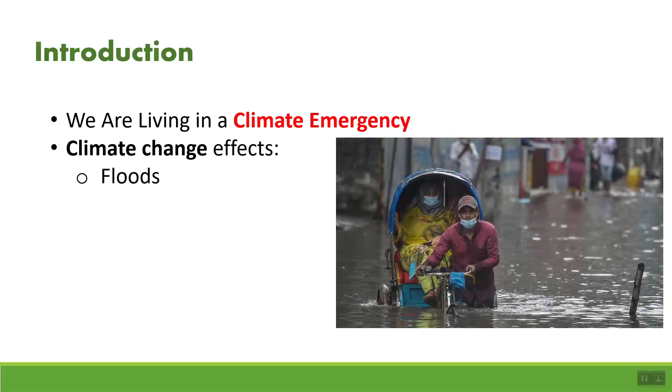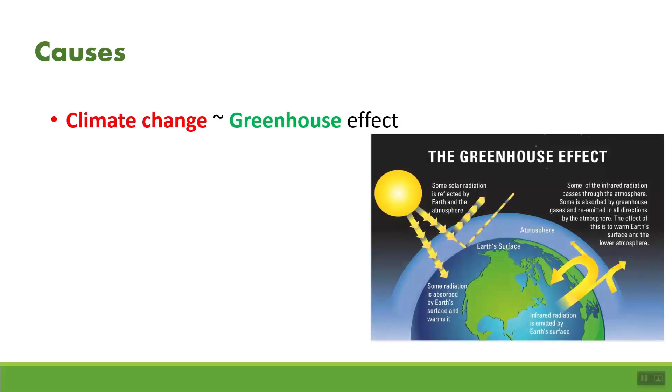As an introduction, at the present moment, we are living in a climate emergency, as is very visible to every person in this world, and every person is affected by this issue. Climate change causes a lot of problems such as floods, wildfires, droughts, and other environmental impacts. The main cause of climate change is the greenhouse effect, which is caused mainly by greenhouse gases including CO2, CH4, and N2O. But mainly, CO2 is the most responsible greenhouse gas, as it is the most common one.

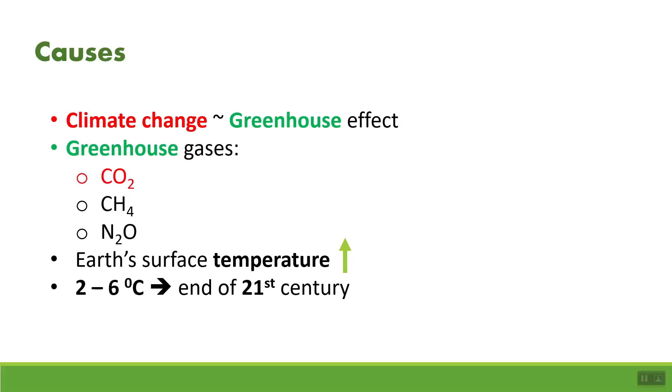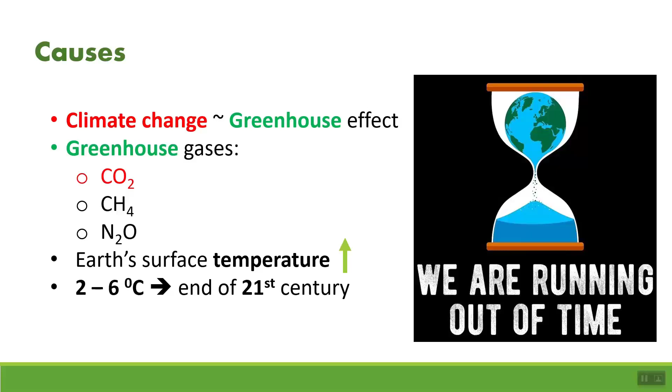The greenhouse effect causes the surface temperature of the Earth to rise with time. Scientists predict that at the end of the 21st century, if we do not make some serious changes about our environmental behavior, we will reach a rise in the average temperature of the Earth's surface by about 2 to 6 degrees Celsius. So we are running out of time. There is no time left to make an environmental action to reverse this serious problem.

Some solutions: the United Nations in 2015 introduced some of the most important and pivotal actions to reverse climate change. They agreed that by 2030 we will achieve about 45% CO2 reduction, and by 2050 we will reach net zero carbon, such that the amount of carbon dioxide we emit, we will reduce its impact by using renewable energy and other strategies, so that we will reach net zero carbon.

This is a common responsibility between all fields and all specialties. In civil engineering, we can benefit this strategy by using sustainable structural design.

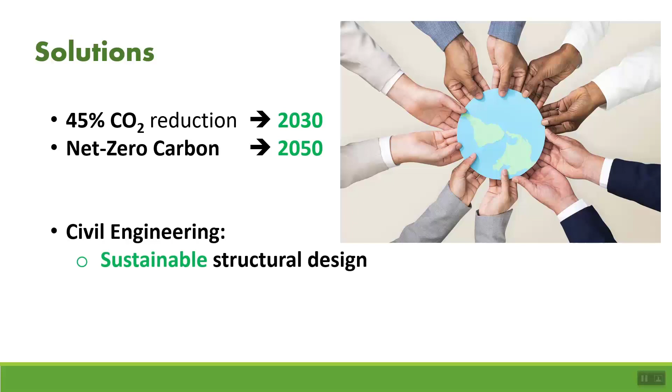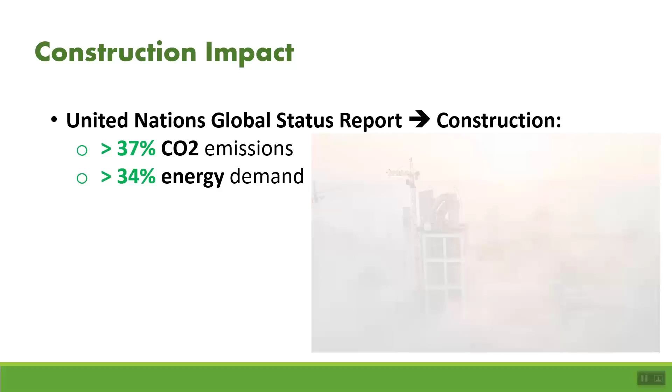To understand the importance of sustainable structural design, we need to see first the construction impact on the environment. According to the United Nations Global Status Report, construction contributes more than 37% of the carbon dioxide emissions worldwide, and more than 34% of energy demand worldwide. Especially the steel industry: the steel industry alone contributes more than 2.5 trillion kilograms of carbon dioxide per year, which represents about 25% of the total CO2 emission worldwide.

The question is, can we minimize this figure? Can we reduce the carbon dioxide emissions worldwide?

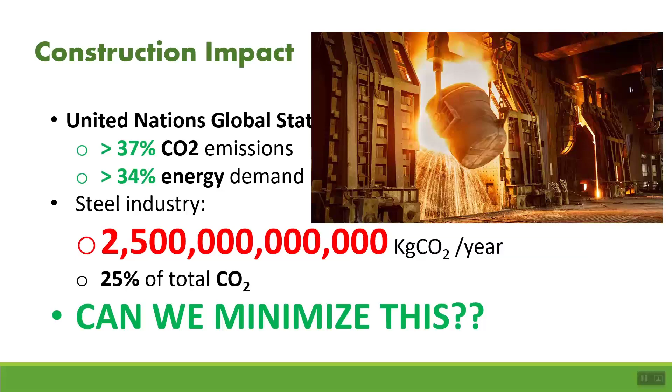The global objectives that the United Nations have put, and Egypt had adopted these goals in its vision for 2030. The United Nations specified 17 goals, which are called the Sustainable Development Goals. These goals aim to achieve sustainable development in all fields, such that by 2050 we will reverse the climate action effect and reach net zero carbon.

From these 17 goals, the main goals that structural engineering can contribute to include decent work and economic growth, industrial innovation and infrastructure, as well as sustainable cities and communities. Finally, responsible consumption and production: we have a limited amount of resources in this world, so we have to be responsible in its consumption and production.

But how? How to achieve these goals? One of the possible solutions is the use of green building materials. Green building materials are those materials that are eco-friendly, that are less harmful to the environment.

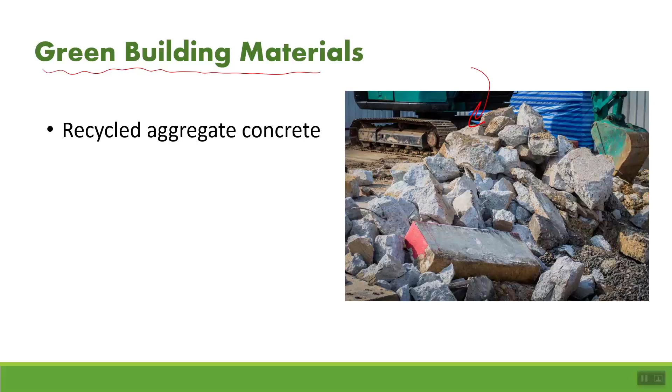These include recycled aggregate concrete. Recycled aggregate concrete is made by demolishing old structures, old reinforced concrete structures, and using the waste materials by crushing it and making it into aggregate for new concretes.

Fly ash concrete: fly ash is a byproduct of the combustion process of coal, which is used to produce electricity in power plants. So this fly ash can be used as a cement replacement in concrete, as we will discuss in this session.

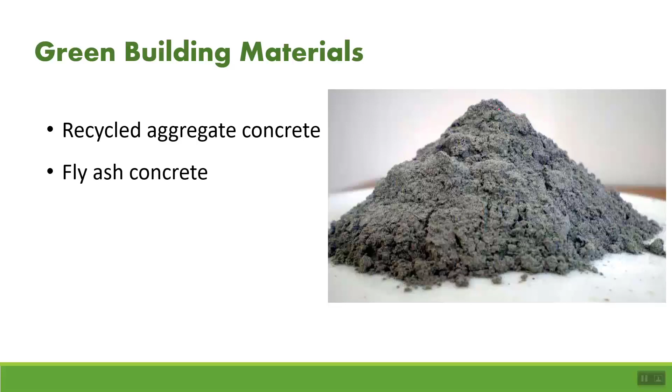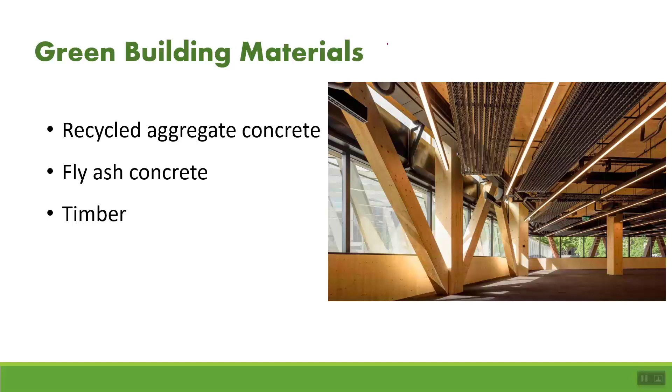Timber is used as a sustainable construction material, especially in the US and Canada, as the amount of trees there is large and can be used as a building construction material. But as it's well known in Egypt, trees are not so commonly available, so it may not be a sustainable material for construction in Egypt. Ultra high performance concrete is a novel material being used in the structural engineering field, which requires a lesser weight of concrete.

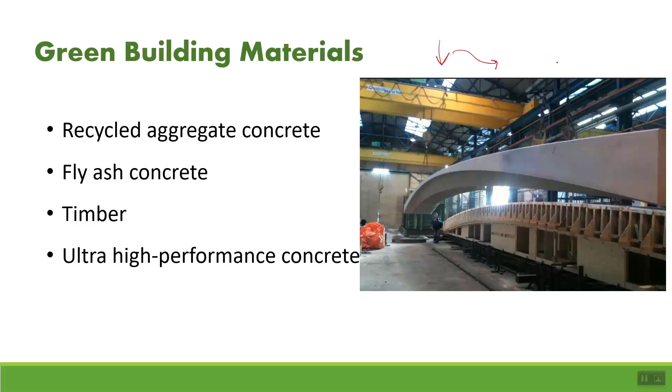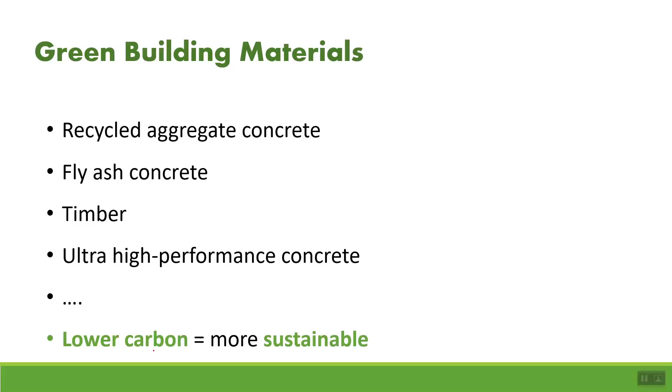So we will use less cement, which will help the environment and reduce environmental impacts. Other sustainable materials are continuously developing and can be used in the future, and we will discuss more materials in future sessions. All these materials have lower carbon emissions, which means they are more sustainable.

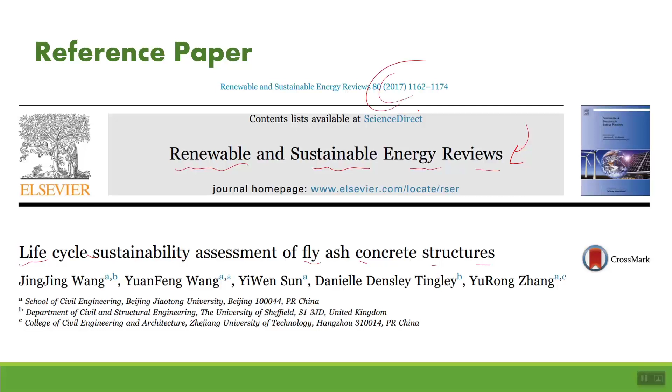Fly ash concrete is the main subject of this session. In this session, we depend mainly on a paper published in Renewable and Sustainable Energy Reviews journal, which is a prestigious journal in the field of environmental engineering. It's called Life Cycle Sustainability Assessment of Fly Ash Concrete Structures, and it was published in 2017.

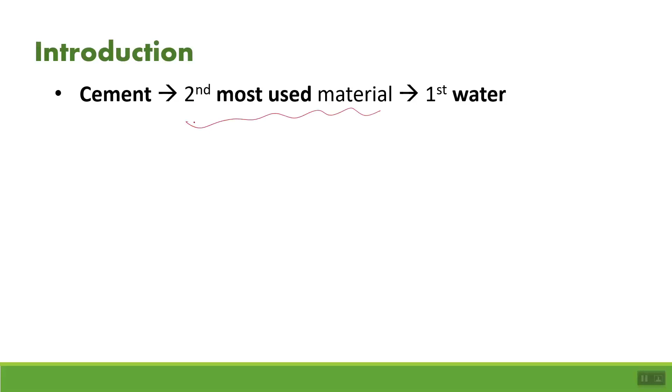As an introduction, cement is considered the second most used material worldwide. The first most used material is water. For each ton of cement produced, we need about 3.1 up to 5 gigajoules of energy to produce 1 ton of cement. For each 1 ton of cement, about 0.73 up to 0.99 tons of carbon dioxide are emitted.

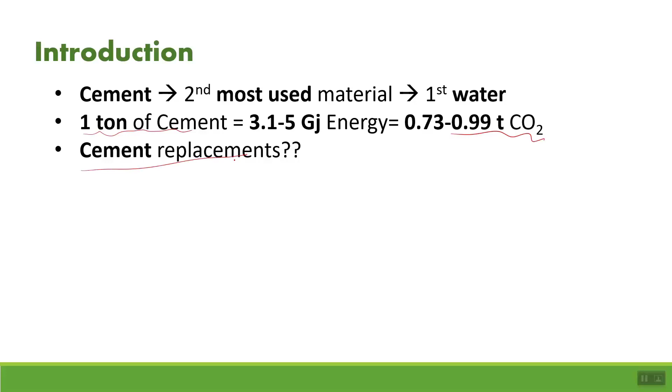So as you can see, cement has a very high impact on the environment. So we need cement replacement. One of the most commonly known cement replacements is fly ash.

Fly ash is a byproduct of coal-fired power plants and is considered the world's 5th largest material resource. This is mainly because of China, which uses coal to power its power plants, so the amount of fly ash produced there is very large, about 700 million tons per year.

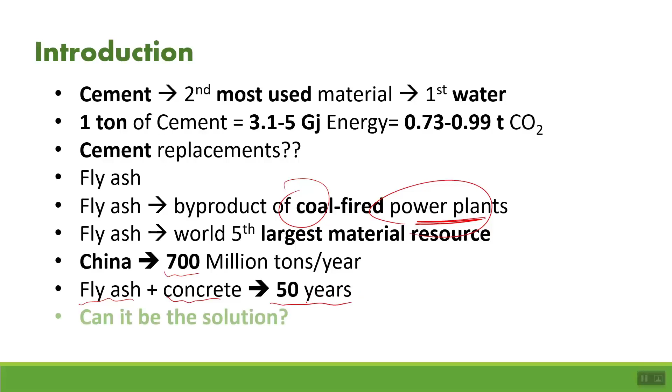The scientific research in using fly ash as a cement replacement in concrete is not recent; it's not a modern idea. It's lasted for more than 50 years. But can fly ash be the solution for this environmental problem and climate change?

How do we judge the sustainability of a material? To judge the sustainability of a material, we need to consider the triple bottom line. The triple bottom line are 3 main factors that need to be considered when looking at whether a material is sustainable or not. The first bottom line is called the environment.

This covers how much carbon emissions are emitted during the fabrication and transportation of this material. The second is the economy, or how much this material costs. And the final bottom line is called social performance, meaning the impact of this material on people, like labor health.

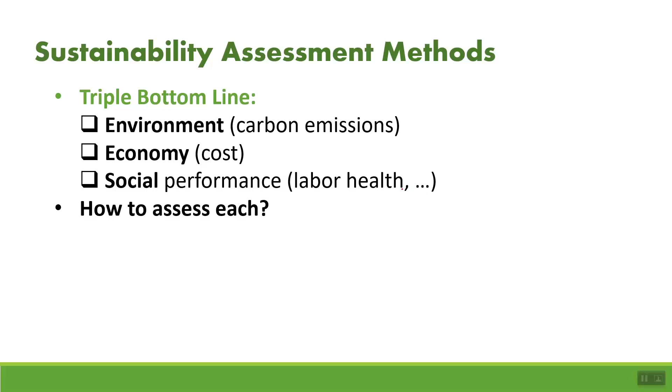How do we assess each of these bottom lines? To assess each bottom line, we need life cycle assessment, LCA, to assess the environmental impact. To assess economy or cost, we need life cycle cost, or LCC. To assess the social performance, we need social life cycle assessment, or SLCA. This way the triple bottom lines can be assessed accurately to determine if this material is sustainable or not.

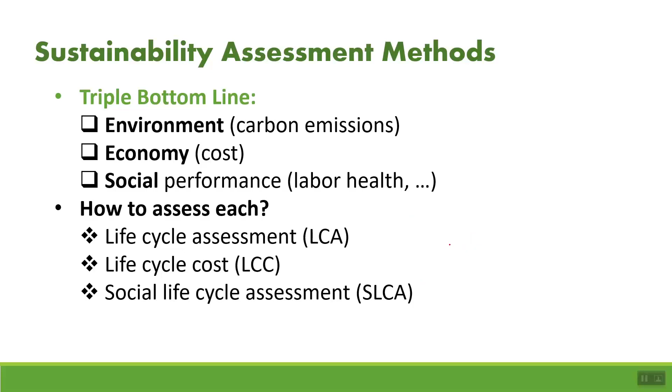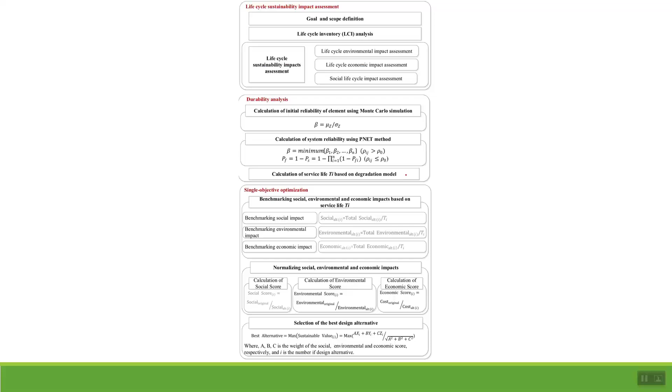The methodology used in this paper—a small notice: this is an engineering paper, so some of the mathematical formulations you do not need to understand, but you need to understand the basic concepts underlying this methodology.

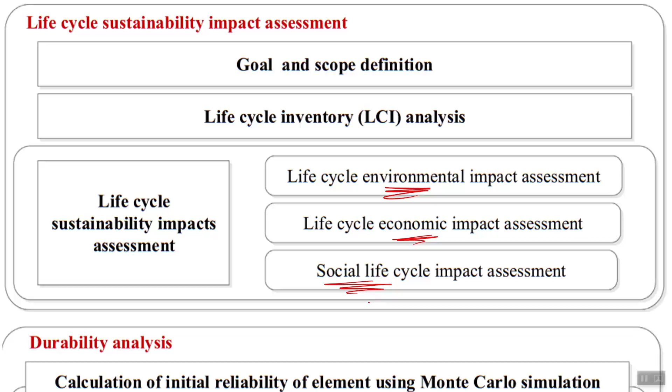First, we need to assess the environmental impact, economic impact, and social life cycle impact of this new sustainable material. Then we need to consider the service life.

You can have an environmentally friendly material such as fly ash, but when using fly ash in concrete, the service life is reduced. So if we use a bridge with reinforced concrete, it may have a service life of about 100 years, but if you use fly ash, it may have a service life of about 25 years. So this is not considered sustainable at all, and using ordinary reinforced concrete may be a better option.

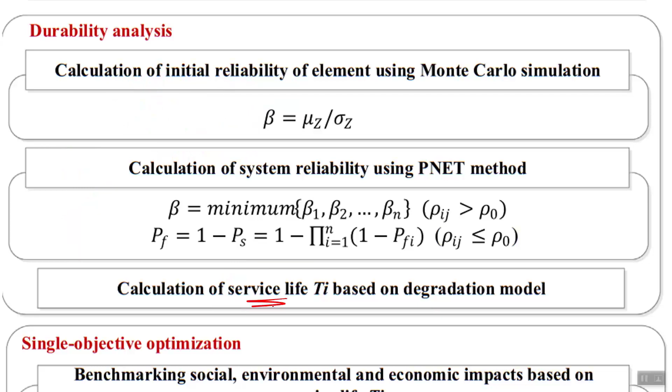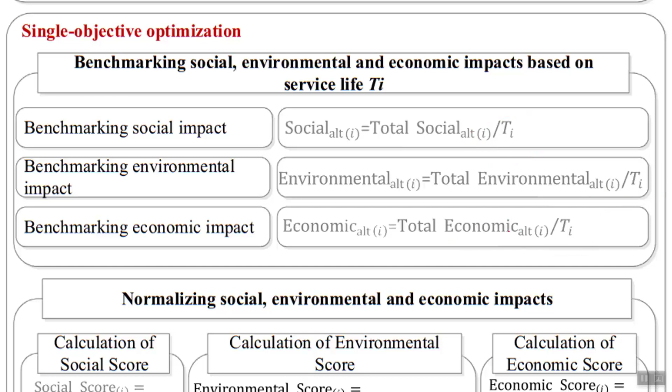So they considered the service life as a factor in determining whether this material is sustainable or not. As you can see, they divided the social impact by the service life, the environmental impact by the service life, and the economic impact by the service life. They determined an environmental score, a social score, and an economic score.

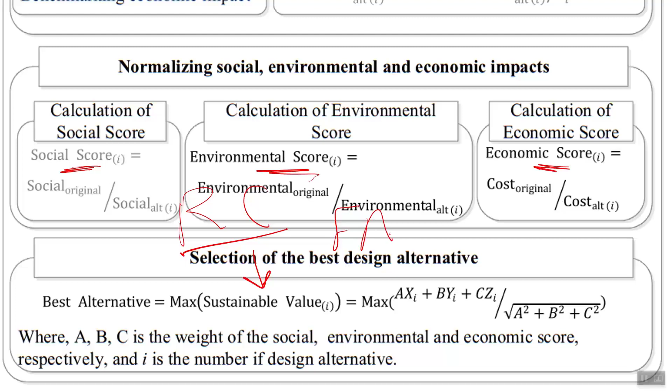Using these three scores, they calculated a sustainable value. This value is used to determine which alternative is more sustainable—reinforced concrete or fly ash concrete. This is the basic methodology used in this research paper.

As a quantitative assessment step, first we need to define the goal and scope. Then we need to determine the life cycle inventory, or LCI. Life cycle inventory is a database of materials that tells us, for example, that 1 ton of cement causes the production of about 1 ton of carbon dioxide. That's what life cycle inventory is all about.

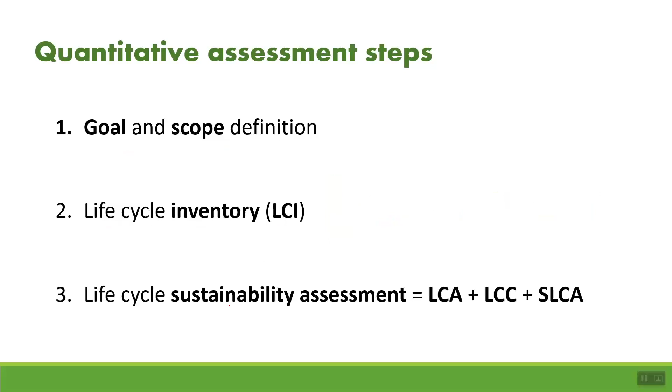Then we need to perform life cycle sustainability assessment. As we mentioned, it's composed of 3 basic steps: life cycle assessment, life cycle cost, and social life cycle impacts.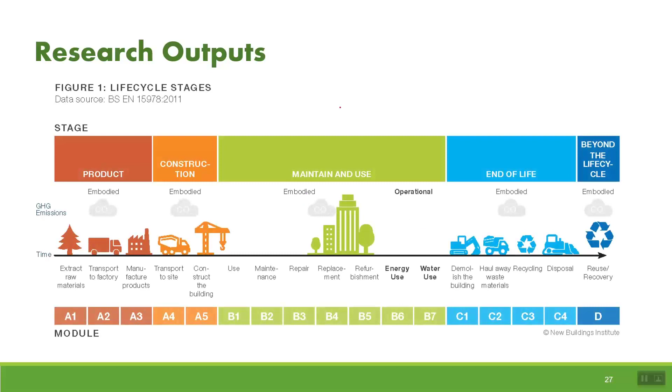According to the British standards EN 15978, which is called Sustainability of Construction Works, the lifetime or the life of a structure can be divided into 5 stages. These 5 stages can be described as follows.

First, the product stage. The product stage consists of 3 main stages: the extraction of raw materials, transportation to the factory, as well as manufacturing the materials.

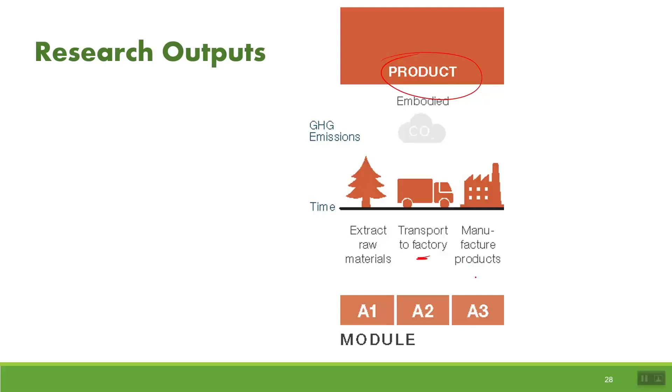Then construction. Construction consists of transportation of the raw material to the site, as well as construction of the building.

The maintenance and use stage. This consists of using the structure, maintenance, repair, replacement, refurbishment, energy use, and water use.

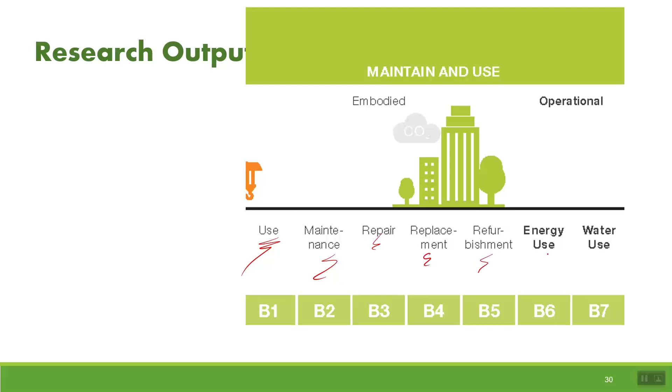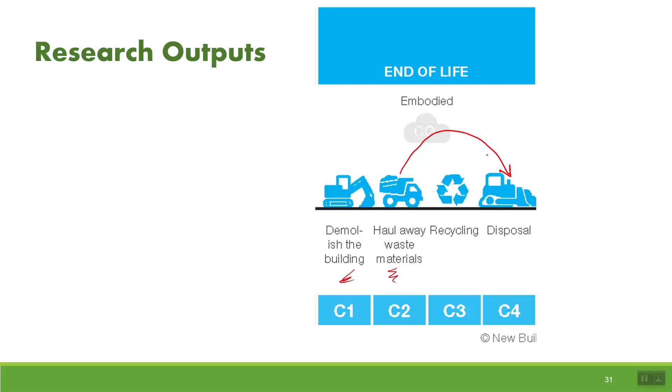End of life stage includes the demolition as well as transportation of waste materials. Transportation of waste materials can be transported for disposal in landfills or on waterways, or can be used for recycling. Then the final stage is beyond the life cycle, or after the building has been demolished.

It can be used for reuse and recovery. These are the main 5 stages for any product or for any structure.

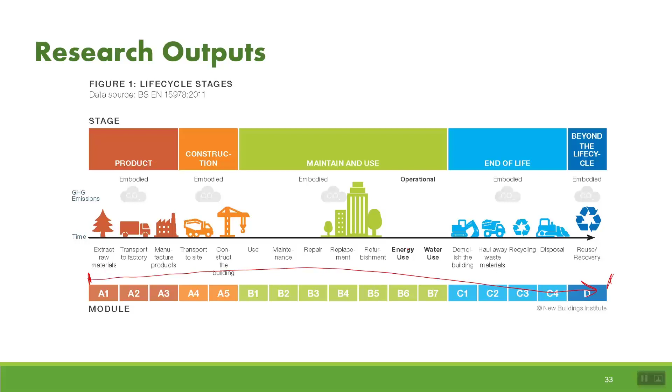If you consider the embodied carbon or carbon emissions from the beginning of the structural life up till the end of the structural life, this is called cradle to cradle. From the moment the raw materials were extracted from the ground up to the point the material were recycled and inputted as a raw material again in a new structure.

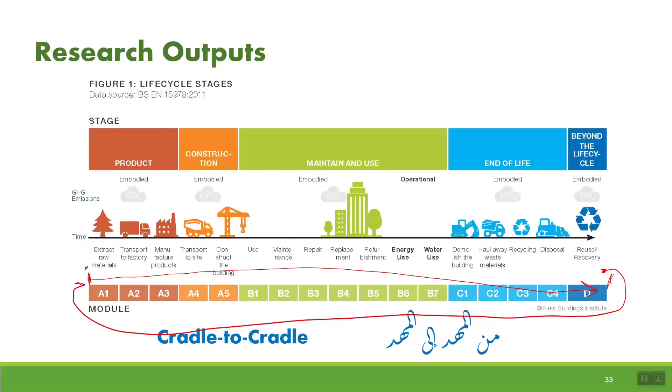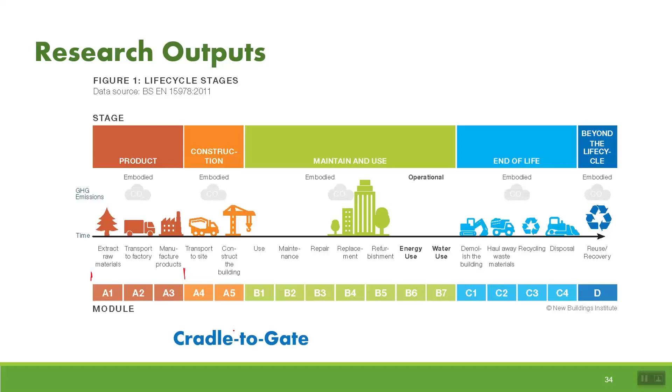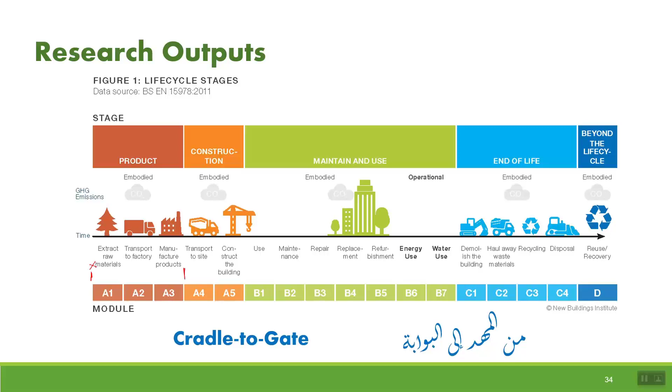But if we considered only the region between the extraction of the material up to the manufacturing of the products, this is called cradle to gate. What we intend from this cradle to gate is the moment from the extraction of the raw materials up to the gate of the manufacturing plant.

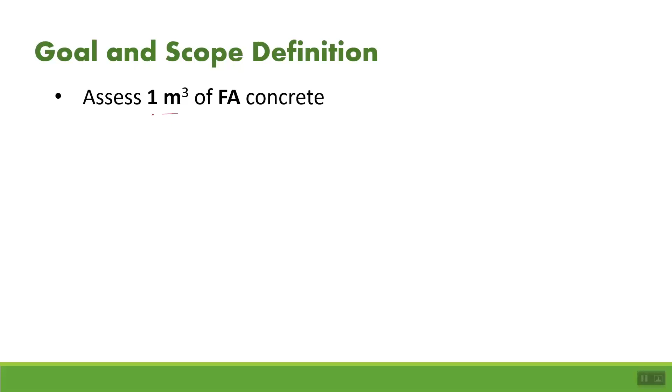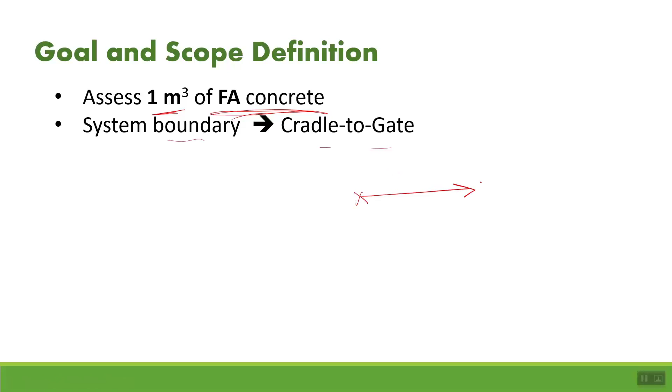First, we define the goal and scope of 1 cubic meter of fly ash concrete. Then we define the system boundary as cradle to gate, meaning from the moment of extraction of raw materials up to the point of manufacturing and exiting the manufacturing plant.

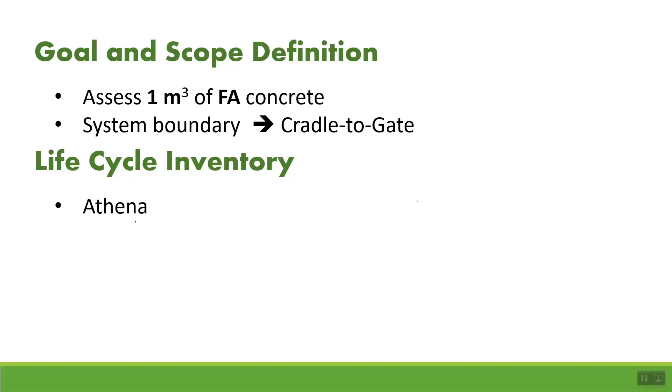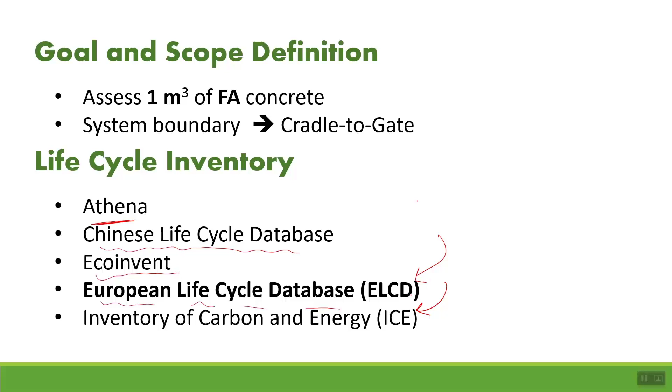For the life cycle inventory, there are many options that can be used, including Athena, Chinese Life Cycle Database, Ecoinvent, European Life Cycle Database, or Inventory of Carbon and Energy. These are among the most famous databases used as life cycle inventory, but in this research, the European Life Cycle Database had been selected.

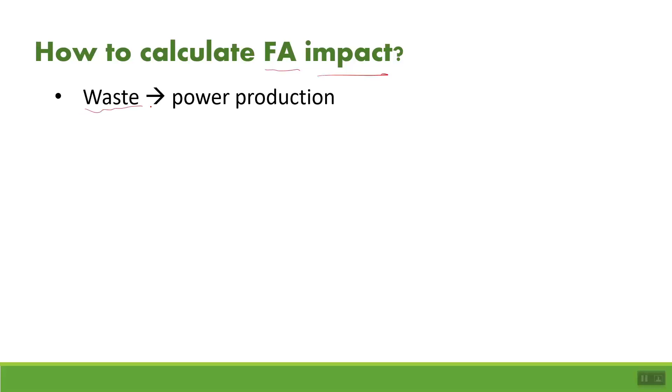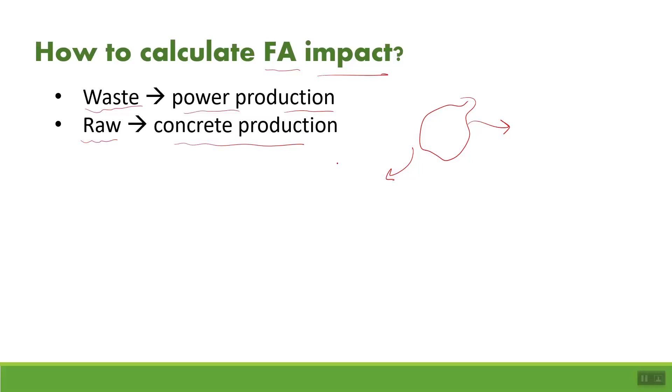How to calculate fly ash impact? First, you have to understand that fly ash can be considered a waste material from the power production process. From burning coal as a source of energy, fly ash is a waste material. But fly ash can also be considered a raw material for concrete production, as it can be used to replace a certain percentage of cement. Then, this equation can be used to consider the environmental impact of using fly ash.

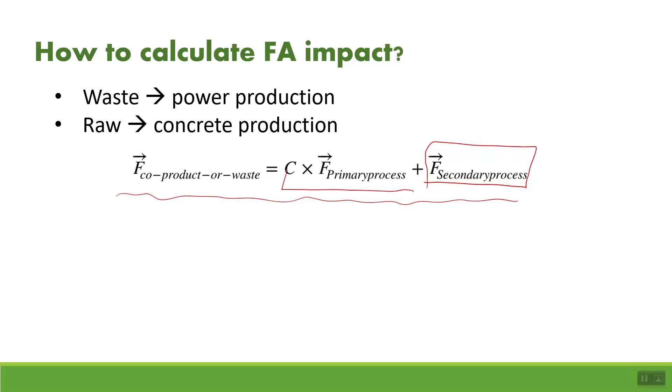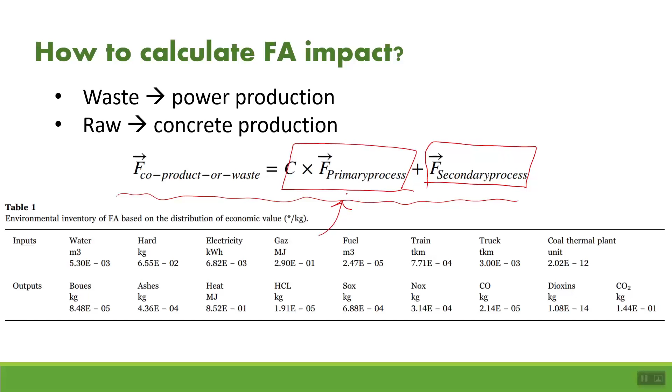First, you have to consider it as a raw material for creating or producing concrete. Then you have to treat it as a waste material from the power production process. These are the factors that have been used in this equation. For more details about these coefficients, the paper has to be consulted.

To make the life cycle assessment, or life cycle sustainability assessment, of the fly ash concrete, we have to consider the triple bottom line: environmental aspects, economic aspects, and social aspects.

To consider the environmental aspects, human health, ecosystem, and resources have to be considered. For the economic dimension, cost of raw material, cost of fuel used in transportation, and cost of energy in the concrete preparation have to be considered. For the social dimension, living condition, medical treatment and health, as well as education, culture, and necessities, including food and clothes.

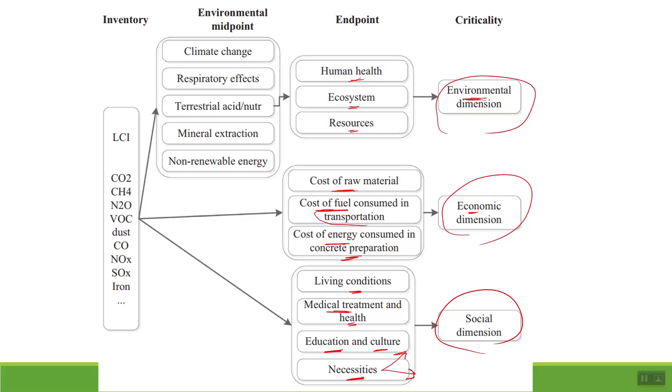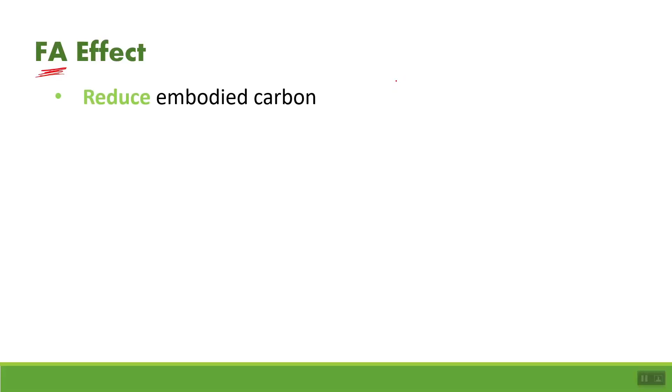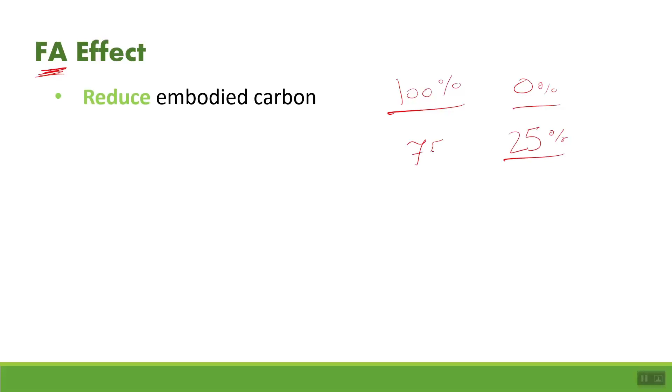When we use 100% of cement in the concrete, we're using 0% of fly ash. But if we used a 25% replacement ratio of fly ash, then we use only 75% of cement in the concrete.

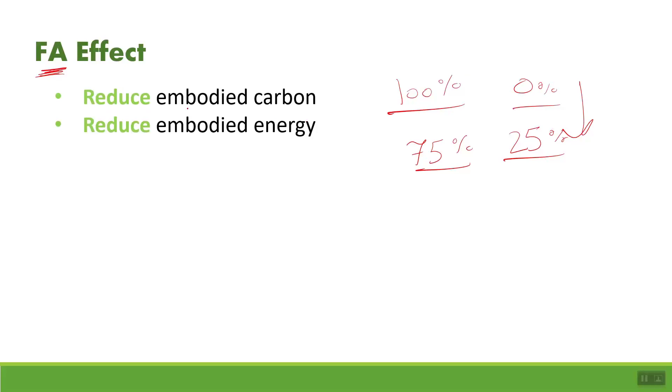By increasing the replacement percentage of fly ash, we reduce the embodied carbon, we reduce the embodied energy, but we also reduce the reinforced concrete strength, and we reduce the service life of the structure, which may lead to reducing the sustainability of the system.

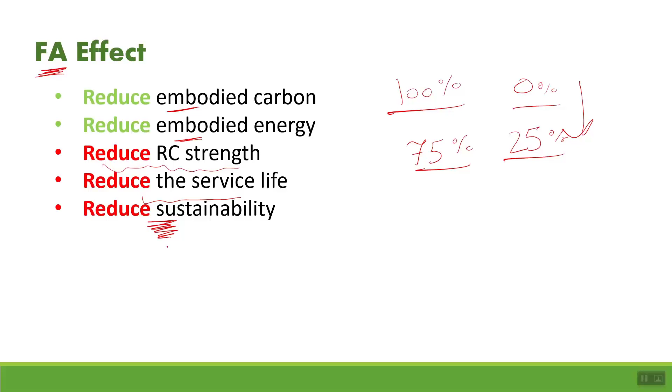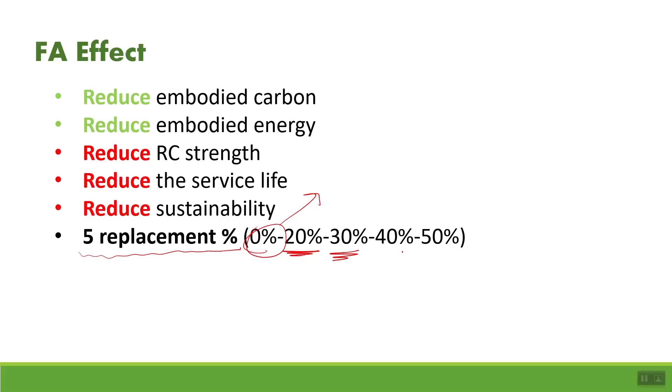Then the researchers considered 5 replacement percentages, including 0% representing ordinary reinforced concrete, then 20% replacement ratio, 30% replacement ratio, 40% replacement ratio, and 50% replacement ratio.

By investigating the case study without considering the service life effect, they found the results as shown.

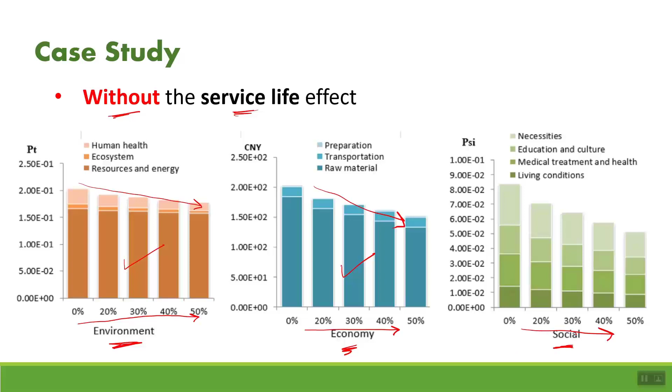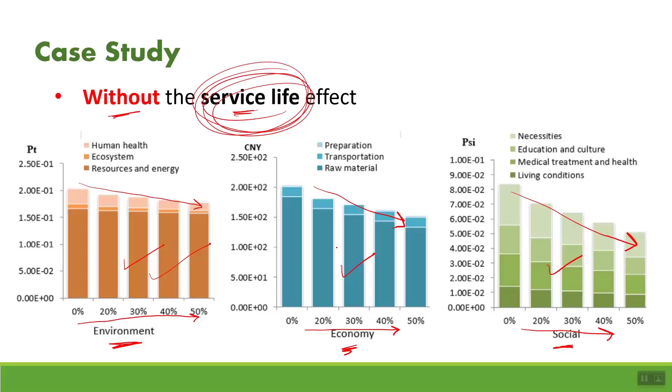For the environmental aspects, by increasing the replacement ratio of fly ash concrete, we found that the environmental impact is reduced, which is a positive effect. When considering the economy, increasing the fly ash replacement percentage reduces the cost, also a positive impact. When considering the social impact, increasing the fly ash replacement ratio reduces the social impact, which is also positive. So when neglecting the service life of the structure, increasing the replacement ratio of fly ash improves the environmental, economic, and social impact.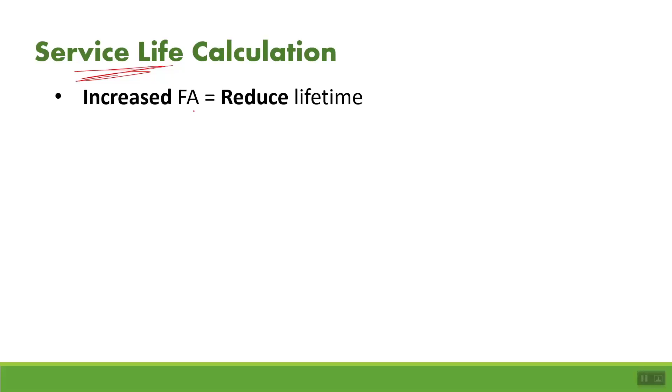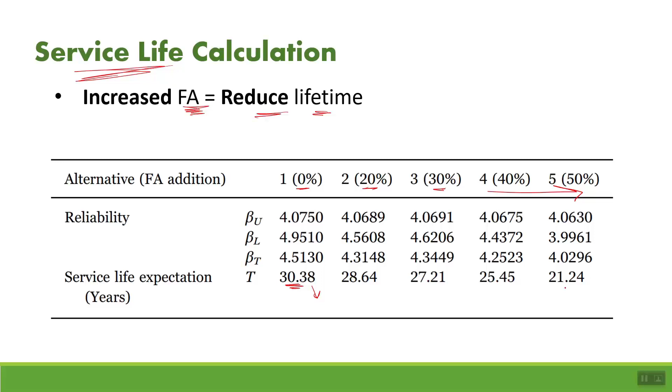But by performing service life calculation, increasing the fly ash replacement ratio reduces the lifetime or service life of the structure. As can be seen from this table, by increasing the replacement ratio from 0%, 20%, 30%, and more, the service life of the structure is reduced from 30 years to 28, 27, 25, and 21 years for a replacement ratio of 50%.

When the same case study is considered but with the service life taken into account, we can see that by increasing the replacement percentage of fly ash in the concrete, at first the social impact is very high, then it is reduced by increasing the fly ash up to a specific point representing the 40% replacement ratio. Then it increases again. So the optimal replacement percentage for social performance is 40%.

But for the environmental performance, as can be seen, by increasing the fly ash replacement ratio, the environmental impact is increased. This can be explained by the use of plasticizers or water reducers with fly ash, to increase the workability of concrete. Water reducers have a very high environmental impact, which causes the environmental impact of concrete to increase, worsening its sustainability performance over time.

Finally, the economic performance: when increasing the fly ash replacement percentage, it first reduces until reaching the least amount at a percentage of 30% replacement, then it increases again. This means that for the optimal or least cost, we have to use a fly ash percentage replacement of about 30%.

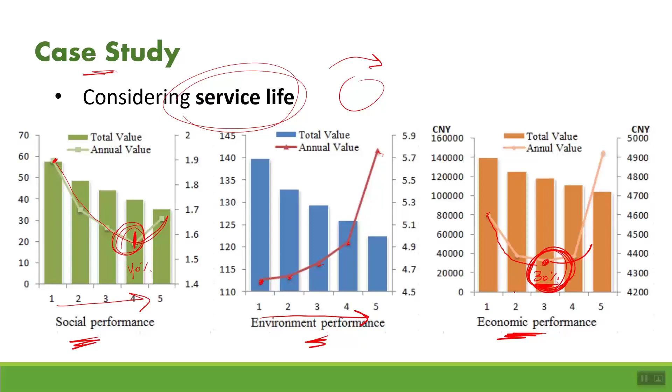For the conclusions: life cycle sustainability assessment has to consist of life cycle assessment to assess the environmental impacts, life cycle cost to assess the economic aspects, and social life cycle assessment to assess the social performance. We also have to include the technical performance aspects into the assessment by considering the service life of the structure. By increasing the fly ash replacement percentage, the environmental, economic, and social impacts are reduced without considering the service life. But when considering the service life, we have to consider other factors. Sustainability consists of the triple bottom line of environment, economy, and social.

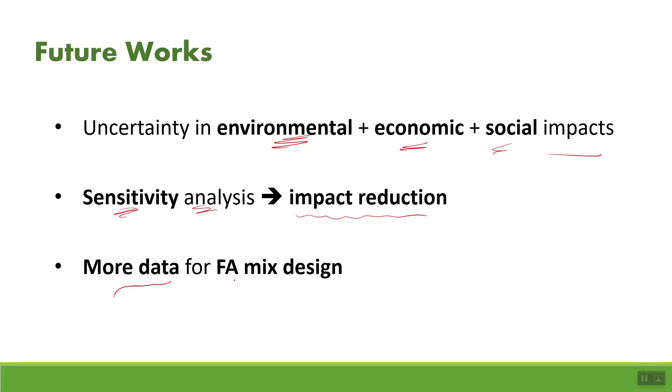For future work, uncertainty in the environmental, economic, and social impacts can be considered, as well as sensitivity analysis to determine the best parameters for reducing the sustainability impact. Finally, more data can be used to design the mix of the fly ash concrete.